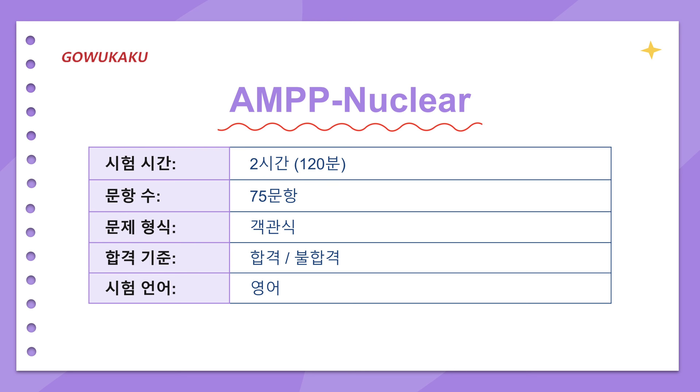So to truly absorb this complex material and help you master it, we're going to proceed at a deliberate, measured, and slightly slower professional pace. Exactly. We've got exactly 7 critical practice questions to cover to really understand the safety and compliance standards of nuclear coating operations. So let's just jump right in.

Question 1. In the context of coating service level classifications, which scenario strictly mandates the use of a design basis accident qualified coating system? The correct answer is A. A design basis accident qualified coating system is required when coating failure could affect safety-related equipment or post-accident recovery functions. In primary containment, failed coating debris may detach during an accident and be transported to sump screens, strainers, or emergency core cooling system components. Because this could impair the emergency core cooling system, this scenario strictly requires a DBA-qualified coating system.

Okay, wait, let me just translate that for a second. If the wrong paint chips off, it essentially turns into plaque in the reactor's arteries. Yes, exactly. It just clogs the water filters right when the reactor desperately needs to cool down. So if the stakes are that high, how do we even test the paint?

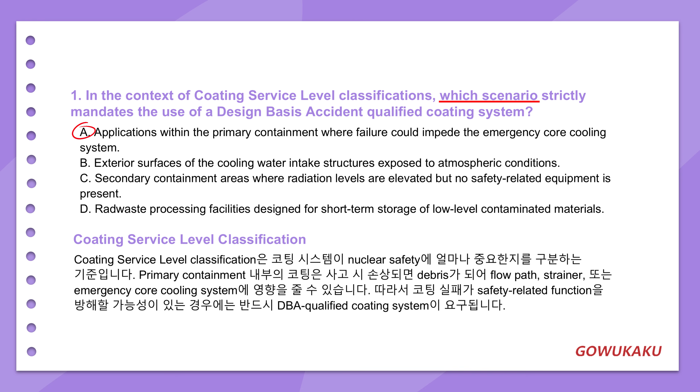Well, question 2. When evaluating a coating system for design basis accident qualification, the testing parameters must simulate which of the following specific operational extremes? The correct answer is B. DBA qualification testing must represent the severe conditions expected during a design basis accident. These conditions typically include high temperature, elevated pressure, radiation exposure, and sometimes chemical spray or immersion, depending on the plant scenario. The purpose is to prove that the coating can remain intact and not generate harmful debris under accident conditions.

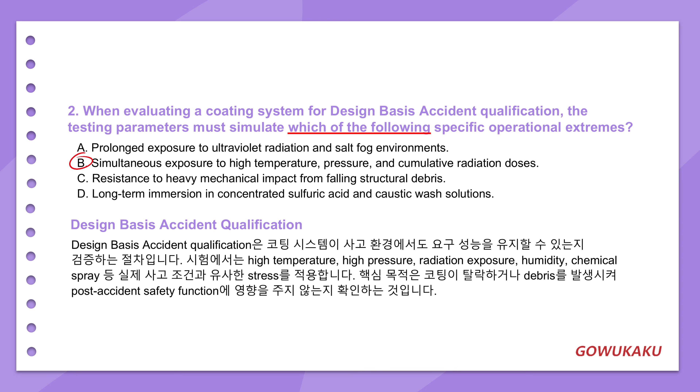Wow. You're blasting it with pressure, chemicals, and radiation. Oh, absolutely. But wait, lab tests are one thing. I could have the toughest paint in the world, but if the applicator does a terrible job, it still fails, right? Yeah. It's like a mandatory safety checkpoint.

Question 3. During the execution of a coating project in a nuclear facility, what is the primary operational characteristic of a designated hold point? The correct answer is C. A hold point is a mandatory stop in the work process. Work cannot continue until a qualified inspector or authorized representative verifies that the required step meets the specification and gives formal approval to proceed. In nuclear coating work, hold points are important because later steps may cover or permanently affect earlier work, such as surface preparation quality, cleanliness, primer application, or dry film thickness.

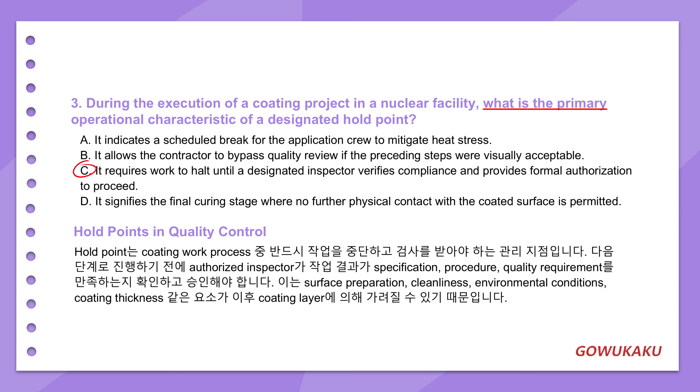Right. Makes total sense. It's like pouring a concrete foundation. If you don't inspect the rebar before pouring, you just can't go back once it's buried. Precisely. Now let's zoom out a bit to the area around the painters. Dropping a wrench into a reactor pool has to be disastrous.

Question 4. What is the primary objective of implementing stringent foreign materials exclusion controls during surface preparation and coating activities near the spent fuel pool? The correct answer is D. Foreign materials exclusion controls are used to prevent unapproved materials, debris, tools, abrasive media, or loose items from entering sensitive nuclear areas. Near the spent fuel pool, foreign material could damage fuel assemblies, interfere with equipment, or create retrieval and contamination problems. Therefore, the main objective is to protect nuclear fuel integrity and system functionality.

So a dropped scraper could literally damage the nuclear fuel itself. Yikes. Yeah, it really could. But here's what I don't get. Who actually enforces this? If federal regulators aren't the ones on the ground holding the clipboard, how do they prevent a disaster?

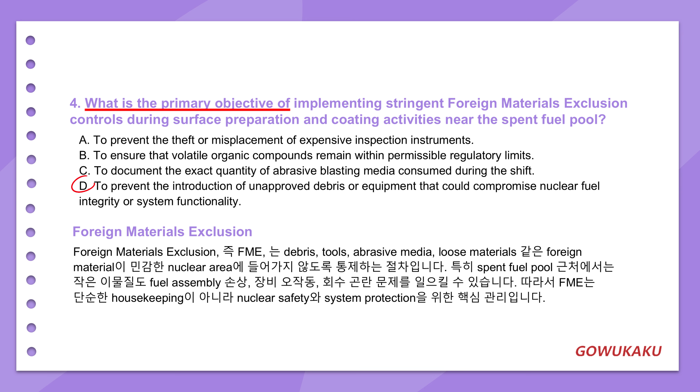Question 5. Regarding regulatory compliance in nuclear coating operations, what is the primary function of the federal nuclear regulatory guidelines? The correct answer is A. Federal nuclear regulatory guidelines establish the safety expectations, legal requirements, and compliance framework that nuclear facility licensees must follow. They define the regulatory basis for safe operation, quality assurance, and protection of safety-related systems. They do not directly formulate coatings, supervise all inspectors, or manufacture inspection instruments.

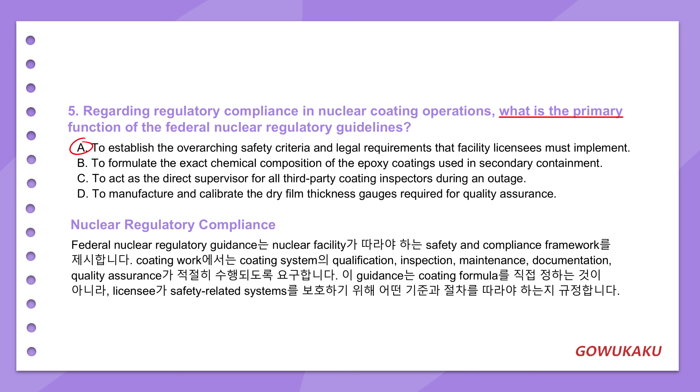Ah, okay. So they build the legal scaffolding, but the facility itself does the heavy lifting. Right, exactly. Now, let's talk about the invisible forces those guidelines account for. I always assumed radiation just sort of burns surfaces, but it's way more insidious.

Question 6. How does prolonged exposure to ionizing radiation typically compromise the structural integrity of polymeric coating systems in a nuclear environment? The correct answer is B. Ionizing radiation can degrade polymeric coatings by breaking polymer chains, known as chain scission, and by creating additional bonds between chains, known as cross-linking. These changes can cause embrittlement, cracking, reduced flexibility, and loss of adhesion. In a nuclear environment, radiation resistance is therefore a key factor in coating qualification and long-term performance.

Wow, okay. So radiation basically plays microscopic scissors and glue with the molecules, just cutting chains and forcing weird, brittle new bonds. That's a great way to put it. That actually brings us to the cleanup. If you're scraping off this irradiated, chemical-laden paint, where does it even go?

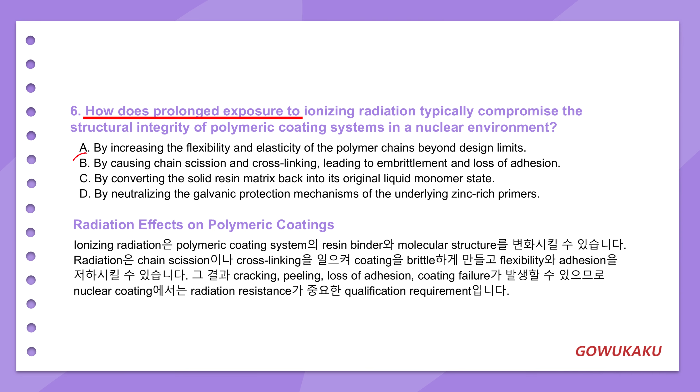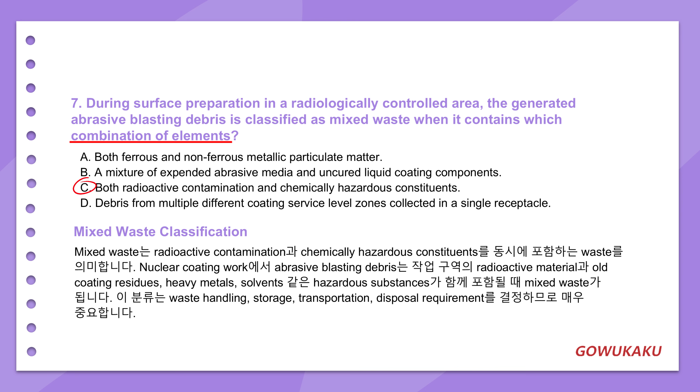Question 7. During surface preparation in a radiologically controlled area, the generated abrasive blasting debris is classified as mixed waste when it contains which combination of elements? The correct answer is C. Abrasive blasting debris is classified as mixed waste when it contains both radioactive contamination and chemically hazardous constituents. For example, debris may be radioactive because it was generated in a radiologically controlled area, and it may also be hazardous because it contains heavy metals, toxic coating residues, solvents, or other regulated chemical components. This combination makes it mixed waste. Man, so it's a double threat of radiation and chemicals.

You have just mastered 7 critical pillars of nuclear coating standards, spanning DBA qualifications, hold points, radiation degradation, and mixed waste.